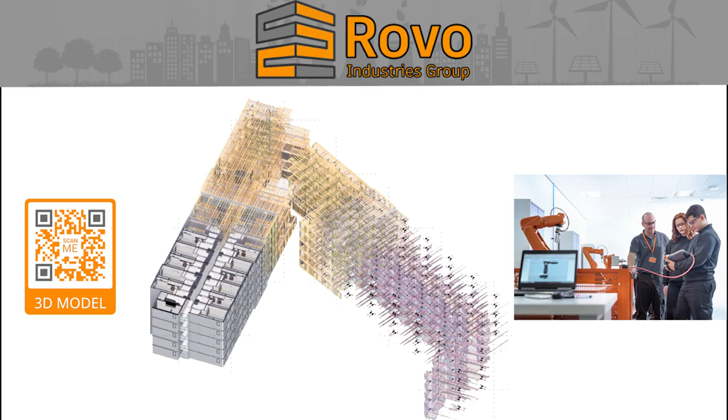In a year where wildfires, flooding, hurricanes, and tornadoes have become even more severe around the world, weather-related disasters have led to record housing displacement, up by 674% over the last decade, all while facing the largest housing shortage in the U.S., exceeding 7 million by most reports, and over 4 million multifamily units. Not to mention how the pandemic has changed where we can live and work. Builders and developers are continuously struggling to find skilled labor, sustainability, and quality building practices to meet our nation's housing demand.

They are looking to our modular industry for help. It's important to acknowledge that buildings contribute to 36% of all global energy consumption, 39% of carbon emissions, and construction is responsible for 30% of landfill waste. Scientists and world leaders are urging us all to work together to enact these changes by the year 2030.

Today, we're here to talk about modular construction automation and the future of technology-driven manufacturing. Let's get started. In another report by McKinsey, you can clearly see why now is a near perfect time to enter the modular market that is primed for growth and scale.

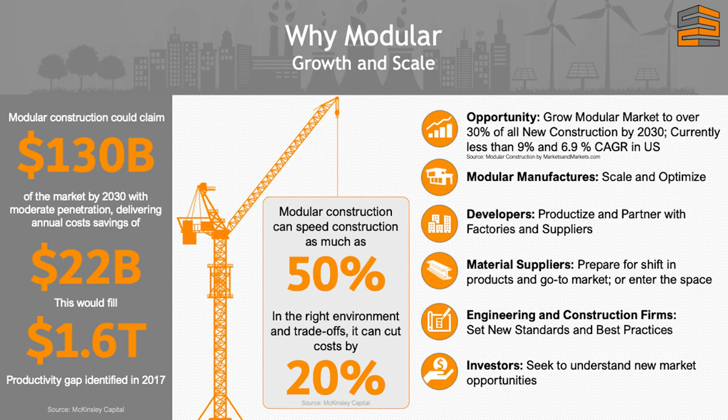We can't do this alone, and it will require us to roll up our sleeves and do the hard work necessary to build this company. Changing any industry can be very difficult, and it requires innovation and market leadership.

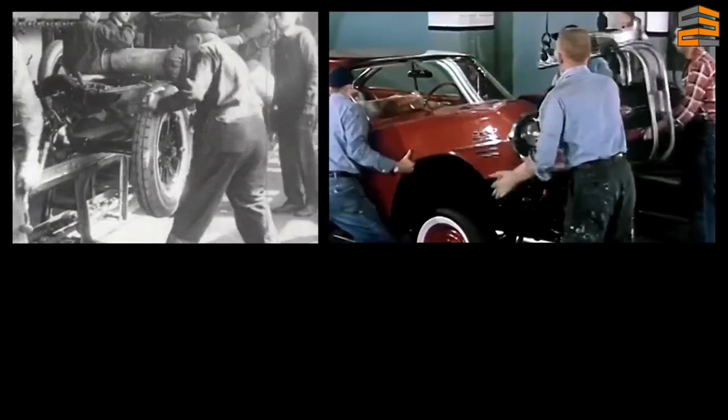Look at the iPhone, for example. There have been 14 or more iterations, and yet we have hardly changed how we build buildings in over 100 years. We've also learned a lot from the automotive industry. In the old days, you would build every part of the car on the assembly line. Now an entire dashboard with all electronics shows up and it gets inserted into the car.

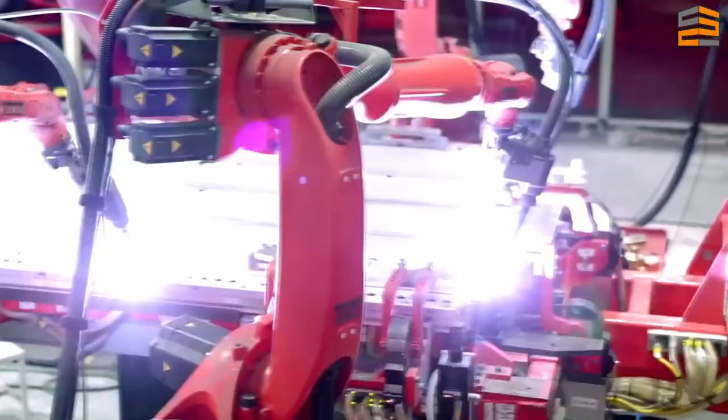Simple as that. Look at how automation and robotics has enabled smaller workforces to achieve incredible scale and growth not seen before. So we can't think of any possible reason why we can't apply the same practice to the modular industry.

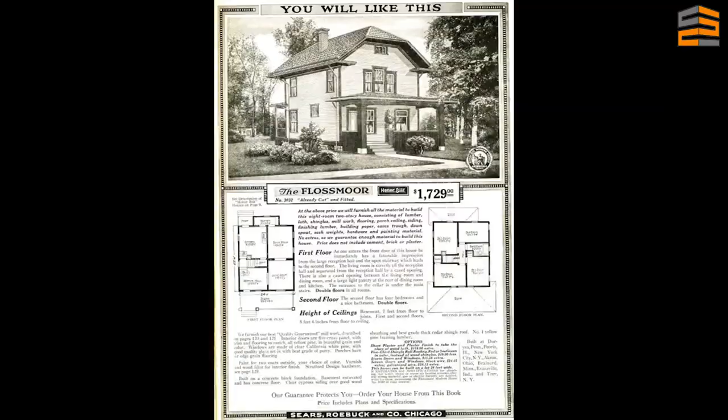The modular industry is a very interesting one, as it's been around for over 100 years. Sears Roebuck pioneered this method by shipping housing systems by rail to cities across the country. That brings us to today, where you can start to see how the industry has evolved.

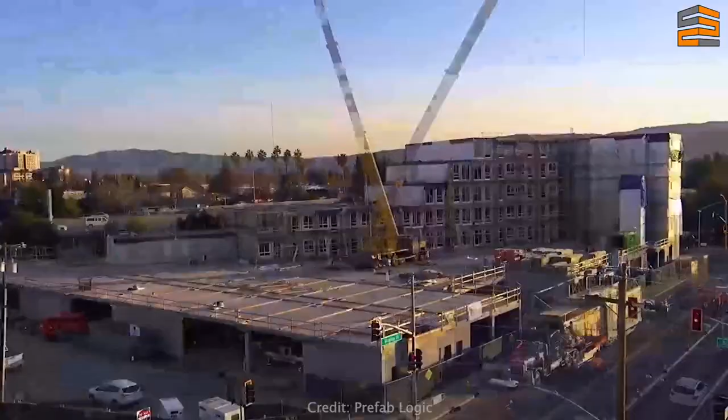As you can likely tell by now, we're very passionate about this technology and the opportunity to lead by example in this vast real estate development and construction market.

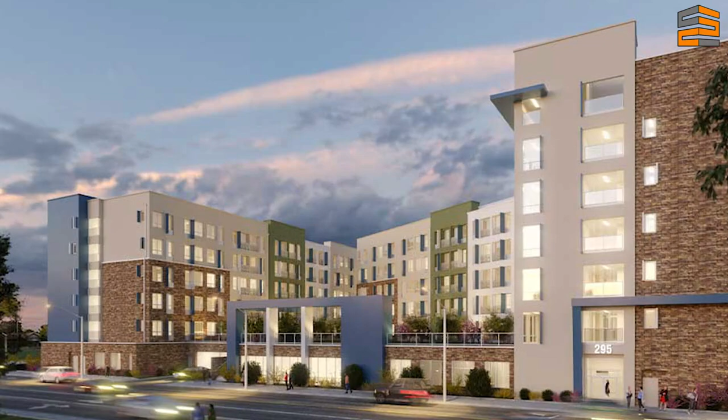Look at the world's tallest hotel built a few years ago in New York City in just 90 days. Marriott, in fact, has a corporate mandate that 25% of their projects are built modular. You probably stayed in one and didn't even notice.

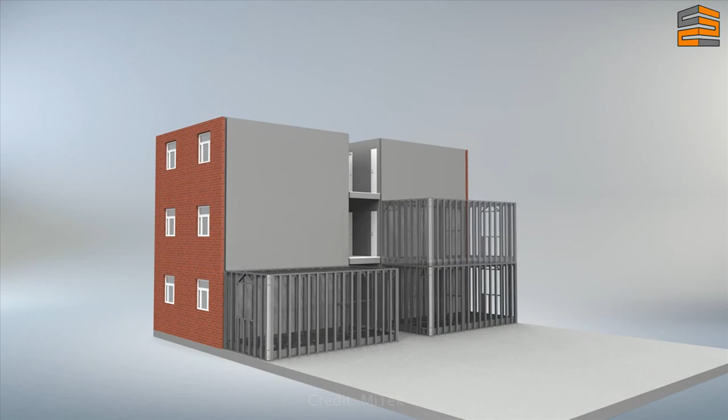Just imagine what we can do in multifamily with our Rovo platform. The whole point of modular is to create a series of subassemblies and build them on a production line into a finished product, much like you would see in the auto industry.

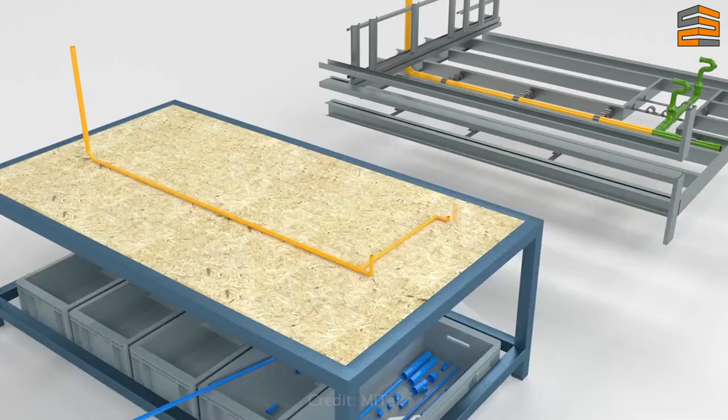We've applied that methodology to low voltage, electrical, plumbing, and many other products. Imagine workers just walk it over, drop it in place, and you're done. Our business model is to become an easy button for developers and builders throughout the United States.

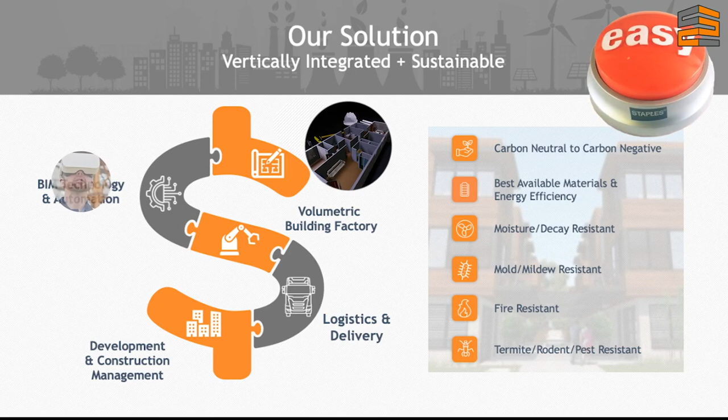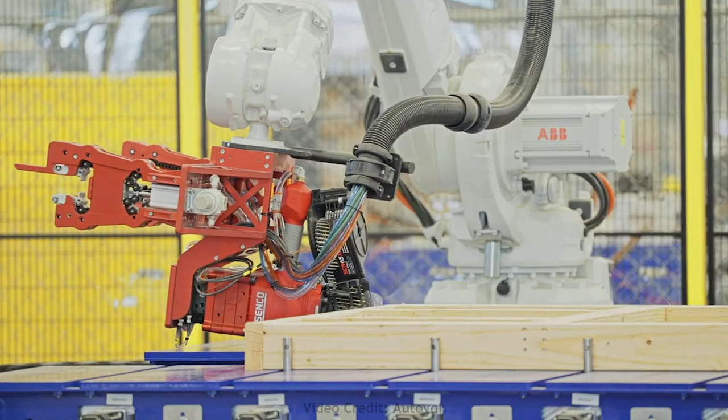The primary objective is to become vertically integrated with our own development corporation to sponsor sustainable housing projects in high-demand markets. We are building a highly automated volumetric factory in Omaha, Nebraska.

We are extremely proud of the team and the effort that has gone into developing our integrated automation platform. There have been hundreds, if not thousands, of hours that have been deployed to methodically working through every step of the building process. So when we say CAD to factory, you can start to understand our mindset.

This system is the backbone to our ability to execute and scale. More importantly, it reduces the staff workload dramatically, all while exceeding the production capacity of most traditional factories.

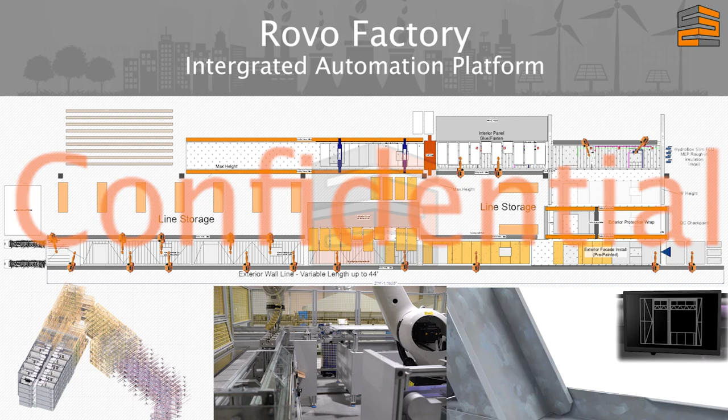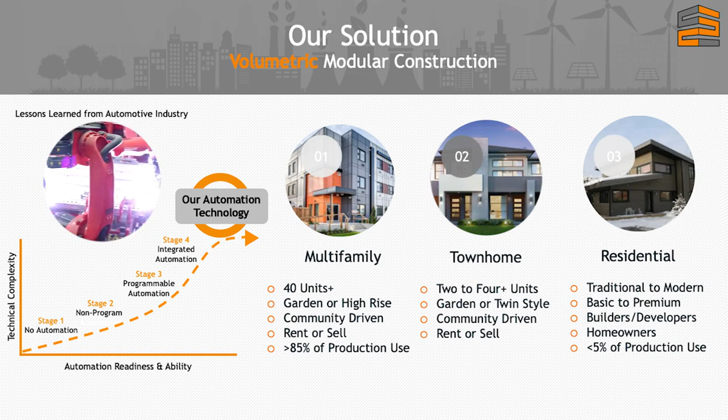We will create the most complete building ecosystem in the industry. More importantly, we will further enable market rate and affordable housing. From multifamily, townhomes, and residential, our platform system will produce high volumes of quality-built engineered structures to fit the needs of our clients' and partners' projects.

Our approach to innovation is system-wide. Every element is purposely designed from prior experiences in the field. A key example of this is our quick stack lock system, a first in the industry.

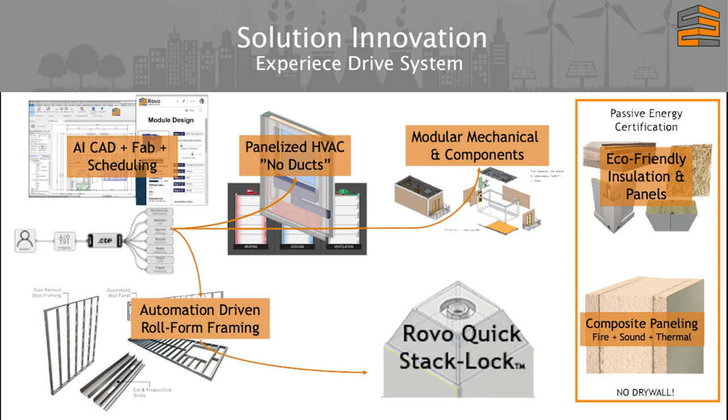From the time the first part is made, the entirety of the manufacturing, install on the job site, and the life cycle of the building - it is all interrelated and interconnected. We're constantly looking at those interactions between these discrete elements. This is to make sure when combined into a final solution, we're accomplishing our broader mission.

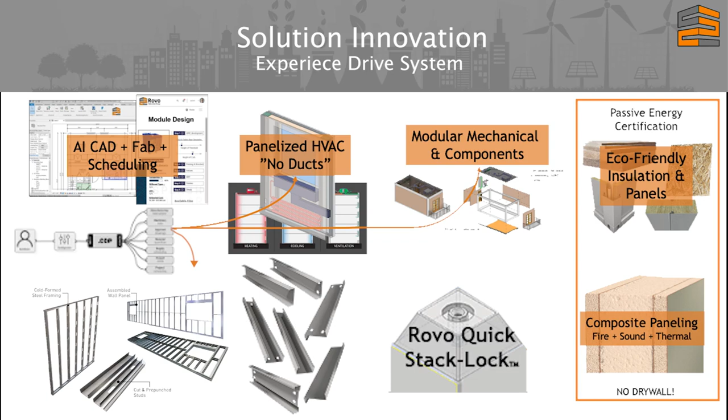By taking projects from shovel to keys, we can control the timeline, costs, and overall outcome of every project. This solution and systemization will also meet or exceed building codes in all U.S. markets. We will no longer rely solely on existing players to bring our products to fruition or wait on others to deliver our housing strategies.

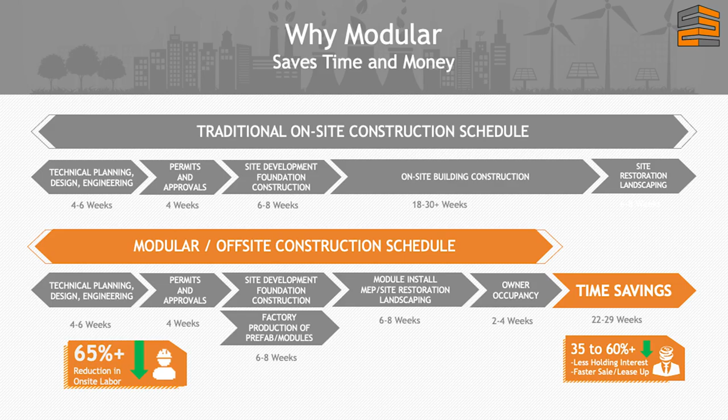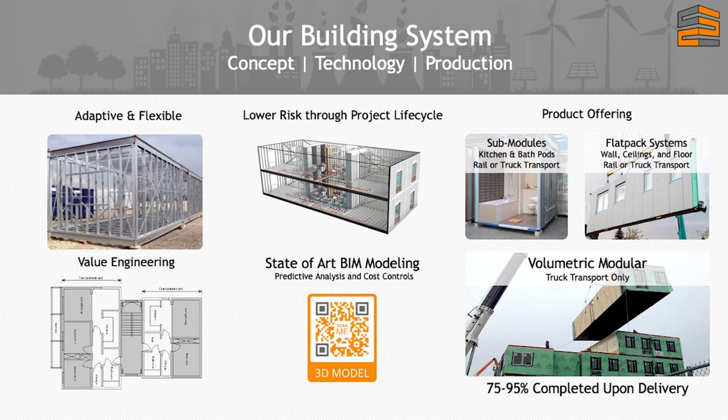From the concept start, our technology will make it easy to do business with our production factory solution. We also can decide based on the scope, location, budget, and timeline which product offering is best suited for each project deployment, not just our factory system. This is the true aspect of value engineering.

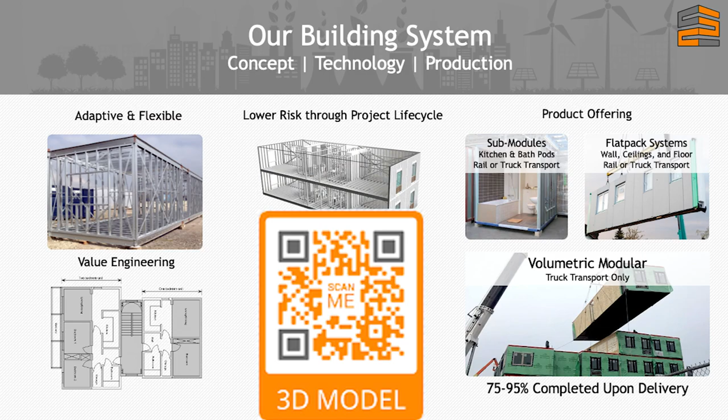In the age of the digital twin and VR glasses, we are taking construction automation to a whole new level. On the production side, our technology allows us to really explore what's behind the walls. Workers will be presented with exactly what they need at the moment they need it to always perform their job, by providing them with a visual representation of what the end game is.

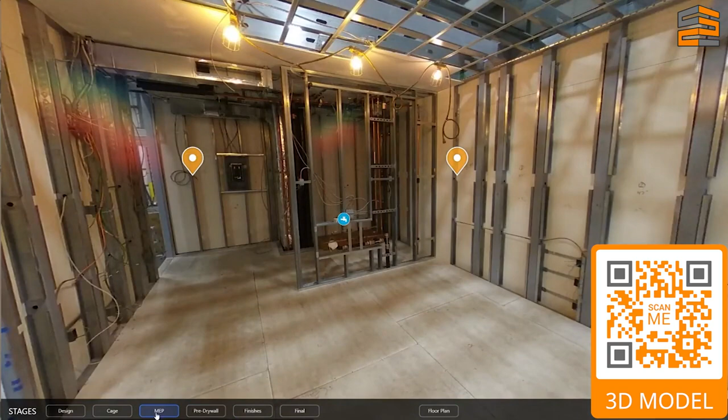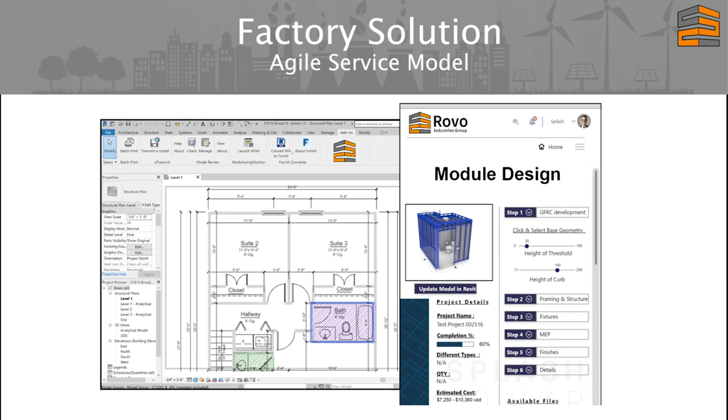We have enabled what we like to call from file to factory. Essentially, we are giving designers, architects, builders, and others the ability to take the concept from their commonly used CAD software, generate it using our modular BIM software plugin, and ultimately integrate it with the automated factory like a giant printer of buildings.

We are also working towards delivering an e-commerce-like experience for our partner builders and developers, as well as future homeowners. This is a key driver, how our solution will deliver on the commitment of higher quality, reduce project time and cost, and ultimately provide scale and growth.

We can provide the best of both worlds in terms of price and scale. When you want to build something that is beautiful yet cost-effective, our thoroughbred mid-market value provides a flexible and adaptive design solution. With our access to a highly scalable network of experienced industry leadership, architects, and building suppliers, it's paramount to tackling this notable venture.

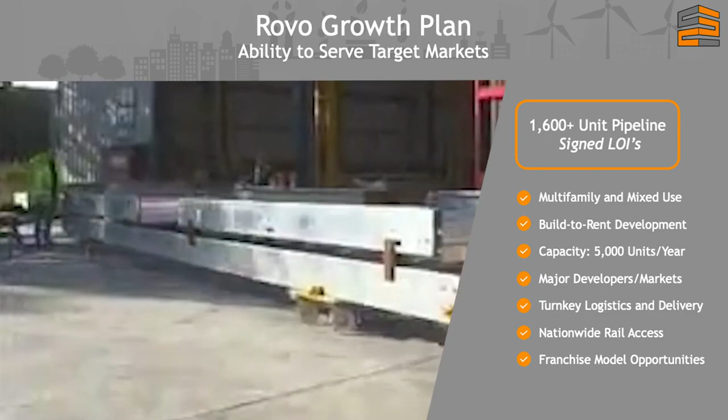With access to rail and our logistics network, we can scale and deliver our building systems nationally. We also will enable partner factories to assemble our building systems.

So let's take a look at the 5 key points we are confident will set us apart and in the long run will propel us to become a leader in this growing market. First, our technology and its enablement of our partner ecosystem. Second, our platform solution is designed and engineered to scale. We intend to replicate this factory model into additional locations as we gain market share and profitability.

Third, we'll have a competitive advantage in terms of cost, time, and overall building quality. Fourth, we will continue to innovate and deliver on the promise of sustainable and affordable buildings. And finally, based on the level of automation that we are investing in, we will be able to reduce our labor headcount by over 60%.

Our human race has been fortunate to live on this planet for thousands of years. We as humans have a duty and an obligation to leave this world a better place than the one we were born into. I reminisce of our childhood days, before smartphones, where we had the freedom to go play outdoors, ride our bikes, and play sports with friends, even at an early age. I don't know about you, but I would like to see our future generations have that same organic privilege.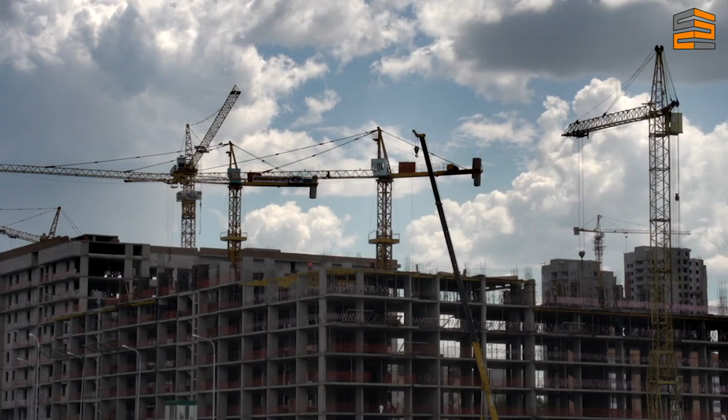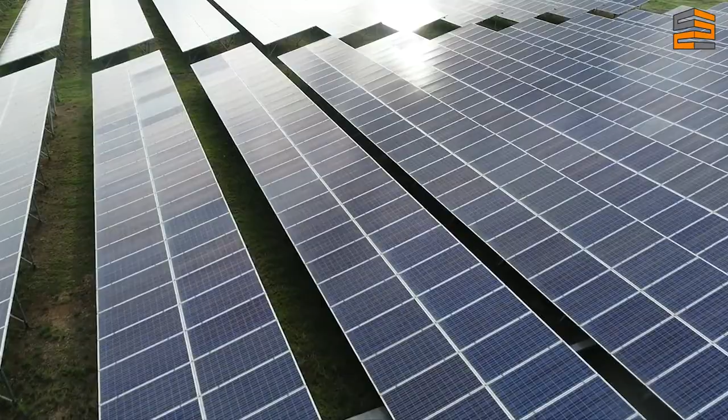The methods in which we build, more importantly the materials that we choose, directly impact the health and well-being of every living creature in the world. So let's start by asking ourselves and others some big questions. Can we as a group make real changes across our worldwide footprint? Can we make our products with more clean energy and aim to drive carbon out of our operations and supply chain? Can we use more renewable and recycled materials in our manufacturing?

By taking on this endeavor, we will not only enable our farmers and ranchers, but we will also unlock new industries that will create hundreds of thousands of jobs, boost our economy, reduce imports from foreign nations, and a host of other economic and environmental possibilities. Best of all, we can create a net zero or even a negative carbon footprint.